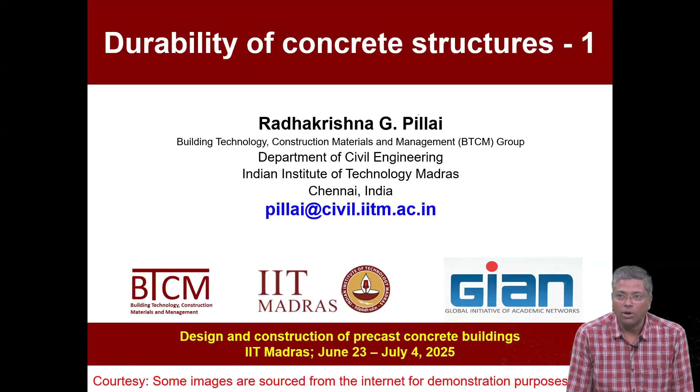What are the durability related issues in reinforced concrete structures and how do we design for it? I'll talk about the design aspect in the afternoon. In the morning, we'll mainly focus on corrosion aspects - the different types of corrosion we experience in concrete structures, and also something we usually neglect, which is the type of steel bar we use. Typically we only talk about mechanical properties of the bar and not anything about corrosion resistance, and we assume everything is fine, but we find some challenges with that too. So these are the things we'll talk about in the morning session.

Some of the slides some of you might have seen earlier also, but for the course we have to deliver those. So we are actually experiencing a construction boom in our country.

When we talk about why do we worry about durability - do we worry about durability? Raise your hand if you really think about durability when we talk about new structures. I want to make this class very interactive if possible, please ask questions in between. Don't worry about the recording which is happening, that is mainly for other purposes.

Okay, so very few hands were raised. What does that mean? Do we really worry about durability of concrete structures when we build them? Or are you only worrying about design for commissioning? Design for commissioning or design for durability - what do we worry about, or both? Tell me. Both, but the weightage for design for commissioning and design for durability, how much is it? Is it balanced? The silence speaks. Okay, so today we'll focus on the second part, design for durability.

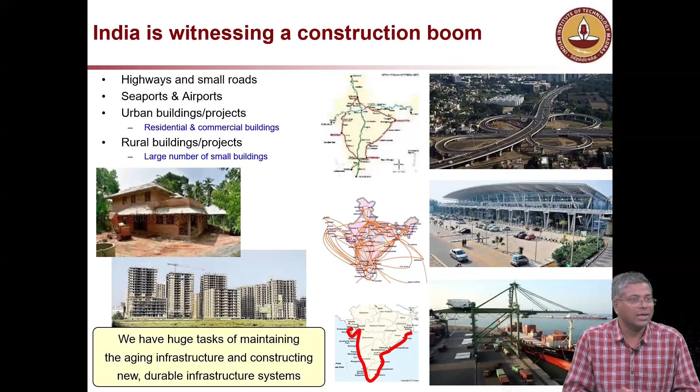Corrosion map - you can see here, the coastal line has a lot of chloride, so it is very important to design for durability. And we'll see why chloride only - is it chloride only? Do you see any other terminology on the screen other than what is important? One is chloride coming from the ocean side, and then you also have carbonation.

I had an experience with one of the buildings in our city, Chennai, where the building is about 50 to 100 meters from the coast, and the problem was not chloride - the problem was actually carbonation. It's a silent killer. Carbonation happens when it is 60 to 70% humidity, which may be the case when you talk about 100 to 500 meters from the seashore. And depending on the pore structure or porosity of the concrete, chloride might leach out - it won't really enter into the concrete if it's too porous, but carbonation will still happen. So it's not only chloride.

Why I'm saying this is generally when people talk about corrosion, they blame chloride first. But carbonation is also something very, very important and we have to consider. We'll cover that also today.

Now, why we really worry about all this is because it costs a lot of money - if there is no financial impact, probably we won't worry much. This chart is all over the place, everywhere we show this chart. About 4.2% of the Indian GDP is what we spend in India - I use the word spend, not invest, because it's actually something you don't get back, no return is there. So 4.2% is for India, very high. Look at Japan - what does it indicate?

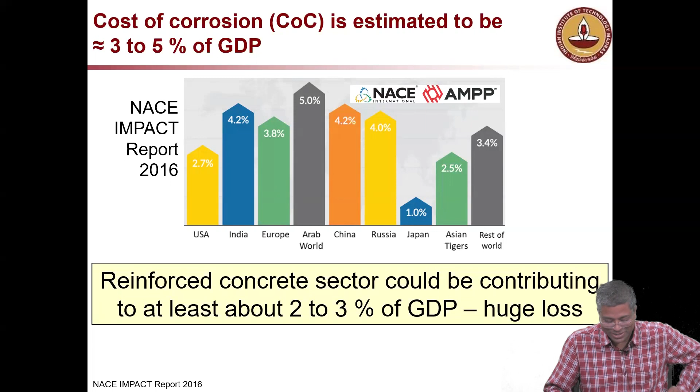Now, those numbers, how do we get them? These are some statistics, because a lot of information is there. Some slides I'll skip very fast, some slides we will go very slow. It's all printed and given to you. So this is just numbers, very large numbers.

50% of the structures actually experience a repair in how many years? It's real data, it's not something I cooked up. There was a major survey we did about 10 years ago, an international survey, and the outcome of the survey was like this.

50% of the structures - so if you talk to anybody in the construction sector here, I was told the other day that when you start a project, in the initial month itself, people will buy repair mortar. Why do you need repair mortar in a construction site?

Whatever - why do you need that? You have to build perfection into the construction itself. You don't need a repair material in the construction site. That indicates that something wrong is being done.

30% of the steel which is made is used to replace other steel. That means the other steel has gone bad, so you are replacing it. Now, gone bad means corrosion, nothing else. 40% of the cement is used for making repair materials. So there is a huge demand for repair, and that demand is coming because structures are deteriorating, either by corrosion or some other reasons.

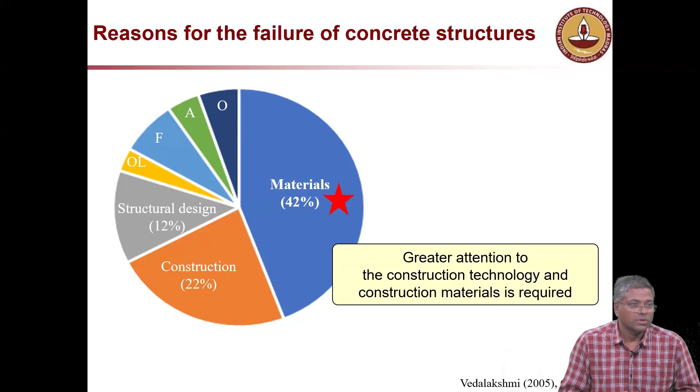It's very, very important. Most of the failures we see, it's not like structural design - that it's perfected now, we know how to handle that part. But materials, we still are learning how to handle it. So there is a lot of things to do in the materials and construction aspects.

So there's a lack of respect for concrete, lack of respect for concrete as a structural material. People generally think you can do whatever you want - concrete is a very resilient material. This is not always true.

Especially houses are something people build, and people's dreams go into them, right? It's not like your cell phone or a shirt which you can replace without really changing your lifestyle. But if you have a problem with your house, imagine the people who bought houses in that apartment complex.

So like that, examples are there in various cities and countries. So corrosion is becoming something very, very important, and in a very hard way we are learning the issues if you do not care about material design.

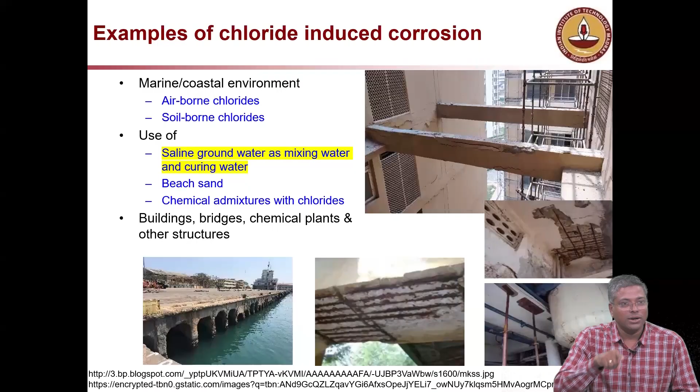See that map which I showed, it was just done. Let me go back. There is something wrong also in that map. This map here is mainly focusing on the coastal belt. Just now I said about Rajasthan, you have issue. You go to Delhi, you have issue. So this groundwater is not considered in this map, this is only airborne chloride which is considered. Maybe in the next presentation I should remove this map. But good point, so we need to think about groundwater.

That's very, very important. This is why I'm showing all these examples, so that you can feel like, okay, there's something to do.

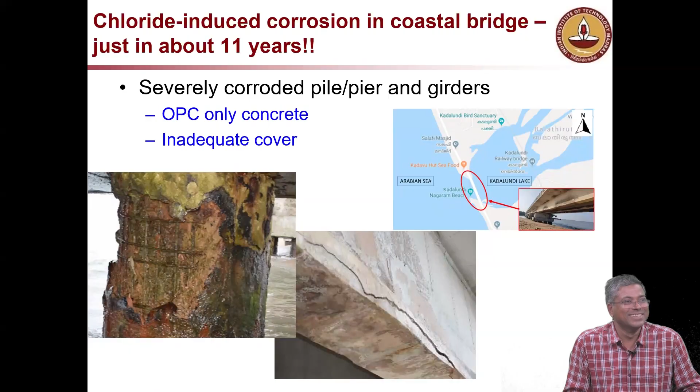See this picture here, again, not a very old bridge. Probably the bridge was designed for 50 years, but we started seeing heavy corrosion in just about 11 years, that means corrosion started well before that. This is not something which you want. This is actually a highway bridge. Shankar would know about this, so tomorrow you can expect a question on that.

Yeah, go. There is 500 ppm is what we recommend. I think it says, right, 456, Shankar? 456 says the chloride limit. No, which code is saying that? 456, no? Yeah, it says 500.

Internationally it is 1000, but in the Indian case it's actually better, we say 500 as the limit. I'll talk about that later when it comes to curing, because even 500 I think is very high, I'll come to that later.

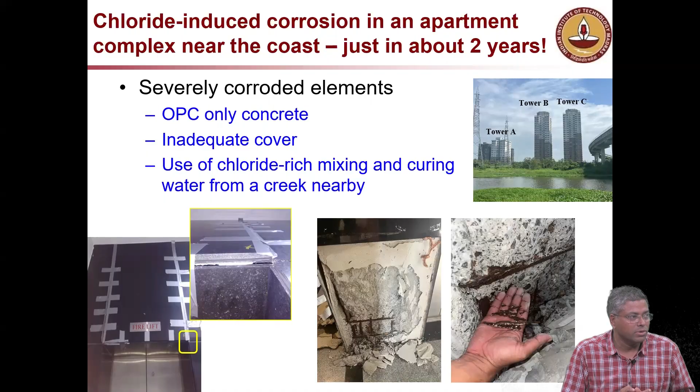We generally think any water can be used for curing because it's happening at the site, so quality control is less. This is again why precast is good, because it will be done in a controlled factory environment where you can control everything more meticulously. So the whole idea of precast is to move everything, or maximum, from site to a controlled factory environment, so minimal work happens at the site. We need better planning, but many other things are there.

Now coming to service life, you have two different aspects mainly, forget about the repair part. I'm talking about 1 and 2, so totally there are 3 phases. The 1 and 2 is what we really worry about in the beginning, at the time of design. So which one do you think we should equate to? When you say service life of a structure, is it the length of the initiation phase, or the initiation plus propagation phase? What do you think we should consider?

Initiation is the time taken for the steel to start corroding, or to be precise, the time taken for chlorides or carbon dioxide to travel through the concrete cover, reach the steel surface, and then initiate corrosion.

In the examples which I showed earlier, that was 0, right? Because you had chloride contaminated water, so day 1 it starts corroding. It took 5-6 years to show up as cracking and spalling and all that, but it started on day 1 itself. Here I am not talking about that example. Here we are talking about good quality concrete, made with good quality water, but eventually the airborne chlorides will ingress into the concrete through diffusion. So that process is what we are talking about here.

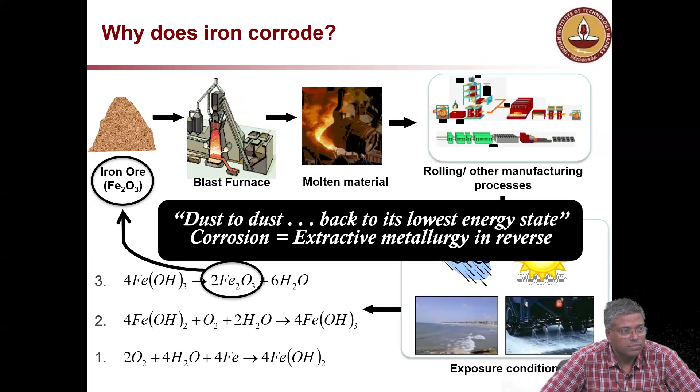You can see a long list of elements there, small in quantity, but they have their own roles in achieving various mechanical and chemical properties of the steel.

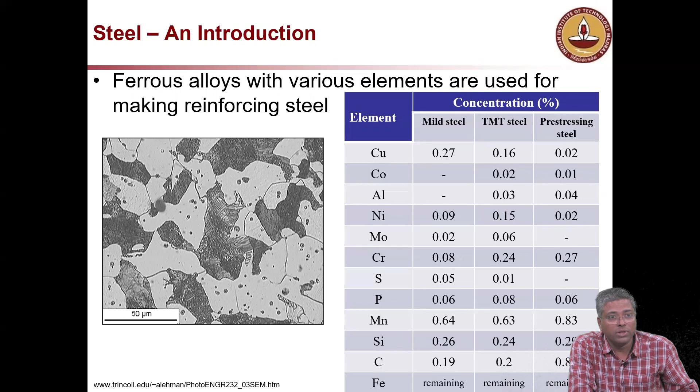Okay, your hand, you put in water, will something happen? Nothing will happen. Put it in acid, you may not have the hand again. Put it in a highly alkaline solution, will something happen? It will burn, very high pH. So more away from the neutral point, pH neutral, you have a problem. Your skin is not stable, it will start reacting.

But steel likes the high pH. It is very stable in a very high pH environment. This is the reason why we are able to use steel in concrete in terms of chemistry. So in addition to coefficient of thermal expansion, which is mechanical, this is the chemical reason. So there are two compatibilities why we are able to use steel in concrete.

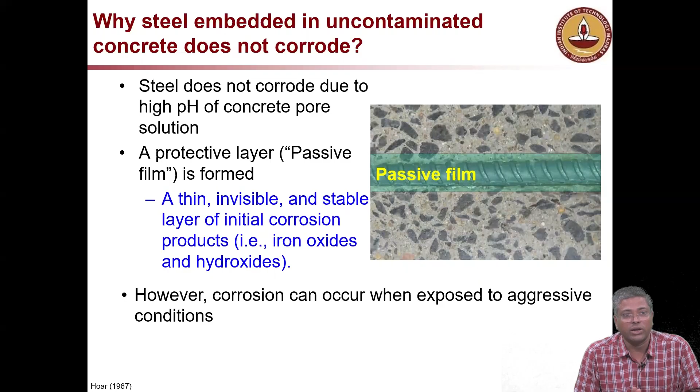Now, before going into chloride and carbonation, do you have any question until now? No, that's a new structure, new phenomenon. It is beneficial, people also use it, and it is much better than using chloride contaminated water for sure.

But you have to compensate for the strength. Curing compound typically does not give full efficiency - the efficiency of curing compound is about 80%, let's say. In other words, if you're talking about 100 MPa concrete, in moist cure condition you get 100 MPa, but if you use curing compound, you might get around 80%. So you have to compensate for that. But that is still a better way than using water which is not good.

And over the piers is where engineers don't go up and check. If you go to any of the, even metro, I have seen some of them, you go up and you will see rough concrete surface like waste concrete, everything will be there on top. You want the top surface to have a little camber so that even when rainwater comes, don't rely only on the pipe which is provided, but try to get the water out. So design for water repulsion or resistance is also another concept, like design for commissioning, design for durability, design for water resistance, design for maintainability.

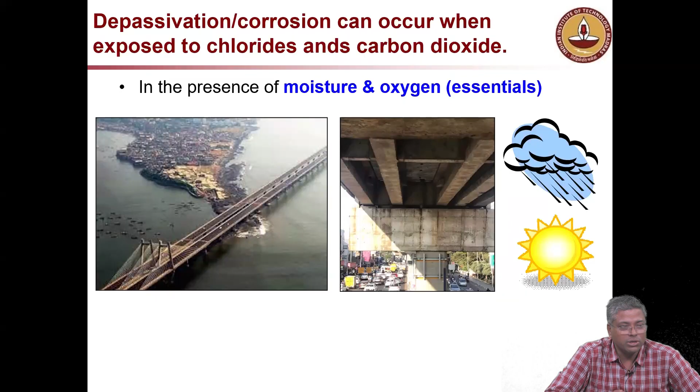But if you go with precast, you can actually do everything at the factory, you can design for all these fine detailing. To do these things on site is very difficult.

When it comes to corrosion basics, there are four components. In any corrosion cell, if one of these four are missing, the corrosion cell will not exist. In other words, it's an open circuit, so you will not have any corrosion.

Now if you have corrosion happening, you will not see that the entire bar is corroding at one point, at one time instant. I'm not saying if you take a bar which was getting corroded for 10 years, you will see corrosion everywhere. But at one point of time, the corrosion reaction will have a few anodes, a few cathodes, and the connection.

The bar itself plays the role of the electronic conductor, and the concrete plays the role of the ionic conductor. This is how it is. Any corrosion reaction, this is how it is.

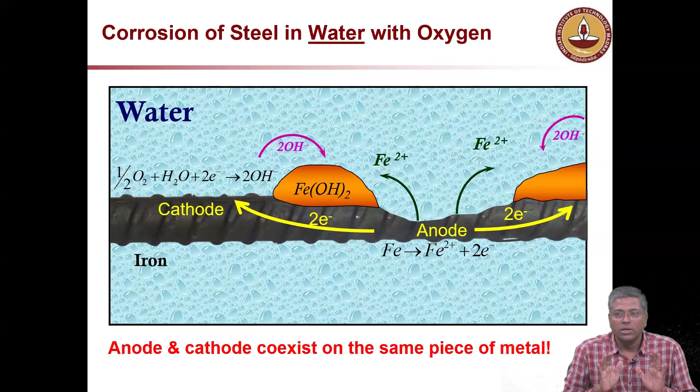I have all these slides, I'll share with you. So there's a 6 times increase in volume. It's a very good deal - you buy 1 cup of steel, you get 6 cups of rust.

It's a good business, but nobody will buy rust from you. People will buy only steel.

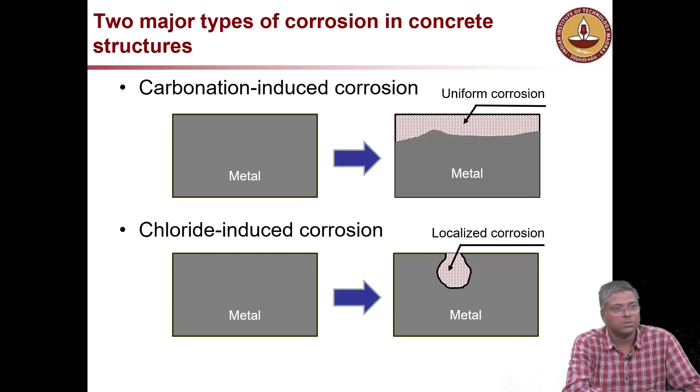What is the difference? In carbonation, you have no pitting, uniform corrosion loss, whereas in chloride induced corrosion, you have pitting corrosion.

I have a slide in the afternoon on that, on plaster. It's only cosmetic - plaster is only covering whatever we could not do properly on the concrete. It's a patch. Only architects will like it.

Usually no, because it's not common - it would be very costly if it were there. The reason is you have more surfaces, you have sand or very fine particles, so the binder has a lot of interfacial transition zones. So the penetration is much faster in plaster compared to concrete, because in concrete I have rock pieces which will block it.

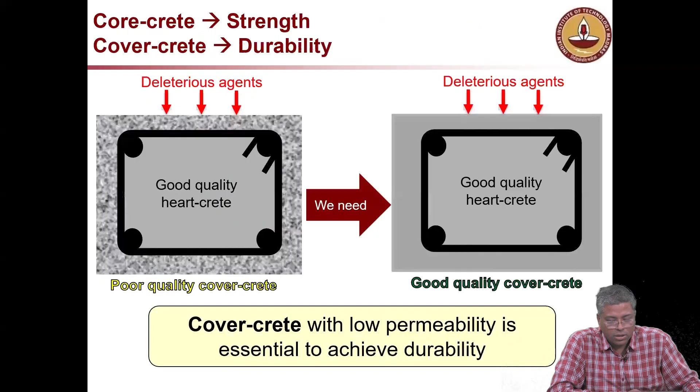Atmospheric CO2, when you say 0.03 to 0.04%, that is far away from the city. Right here, if you go and measure, you will see very high levels, close to 1000 ppm. We have done that measurement - we drove from the seashore in a car and measured the CO2 level along the roads, and it's very, very high.

And if the relative humidity inside the concrete is around 60 to 70%, that is the worst scenario. Most of the case it is like that in Chennai. If you go to Delhi, maybe not - it will take a long time to carbonate because it's a very dry environment. If you go to Hyderabad, maybe not either. So you have to look at the ambient humidity condition to see whether you should worry about carbonation or not.

So when doing material selection, you have to think about multiple aspects - it's not just one point you take and make a decision. You have to think about exposure condition, and what is the life you want. If I want to build something for 10 years, I don't worry about all this, but if I want to design something for 50 years, I have to worry about it.

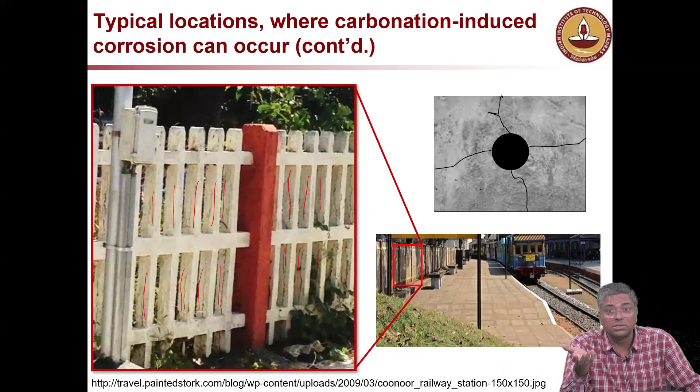Now this - many of you might be familiar with railway stations. I have talked to railway people, they said every 2-3 years they change this. Imagine there are 7,000 railway stations in the country, and think how much waste you are creating with this. This is just mortar with a rebar, a very thin 6 mm diameter rod inside - a very good example of carbonation-induced corrosion. It has nothing to do with chloride, and this is something we should not practice if we want longer life. Again, you might say this is not a major structural element, but it is creating waste which we have to manage later.

So what is carbonation? Carbonation is essentially - you see the yellow equation there - you have a high pH contributor, which is calcium hydroxide in the concrete, that reacts with carbon dioxide, giving you something.

Now when this reaction happens, what happens to the pH of the concrete? Look at the equation and think about what happens to the pH. It reduces. Why? Because I am consuming - what am I consuming? Why is the pH decreasing? OH minus is getting consumed in this reaction.

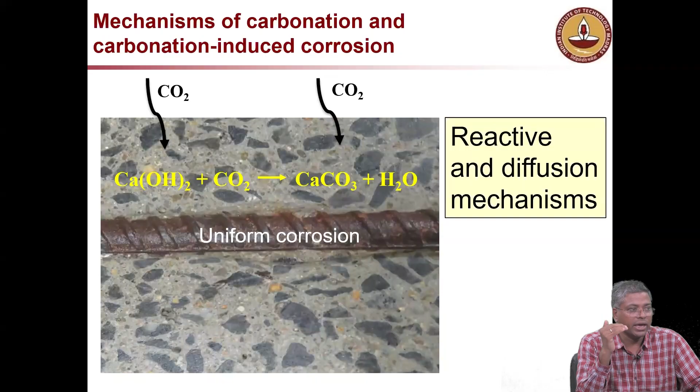So when the pH of the concrete at that interface between steel and cover reaches about 9, steel will start corroding. Steel will not corrode when pH is very high - even people say at 10 it starts corroding, so different theories are there. But let's say for this class, we will say 9 is the critical pH. So when the pH of the concrete at the steel surface reaches 9, steel will start corroding. This is how it really happens.

More detail on what it does - you can see that first the CO2, if there is enough moisture, will form an acid. That also causes a problem because you don't want an acidic environment, that is why the pH is decreasing. And eventually you can also see that later the CSH, which is the binder, gets disintegrated - that means again, it is not something you would like to have.

Then eventually when the pH reaches 9, it attacks the passive film, which is not stable enough. We discussed that with the Pourbaix diagram - this one here, when the pH reaches about 9, you see on the horizontal axis, look at 9, draw a vertical line over there.

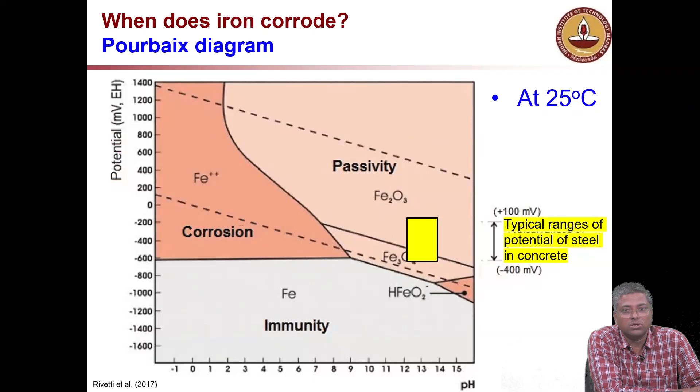Okay, so you see that corner over there, that V shape kind of at the 9 o'clock position, from that point onwards to the left side, it is corrosion, the dark brown region, right? So pH 9 is something which is very critical. You don't want a concrete with a pH of 9 or below, because it will start corroding the steel.

Now, how do we test it? It's very simple to test. What you look at is the depth of carbonation. You can see here, this is a cross section of a fractured piece of a beam, which we are exposing with different types of concretes. You can see here the peripheral region is colorless.

If you go back to your chemistry class, 11th grade or so, you might have done some experiment where the color changes from pink to colorless, or colorless to pink.

Using a titrator, suddenly it changes color, right? So the pH, that critical pH of 9 - you can spray phenolphthalein solution on the freshly fractured surface. Why freshly fractured? You cannot break it today and come back to test tomorrow, because it will already have reacted with the carbon dioxide or moisture available in the immediate environment. So you will not see reality. You have to break and immediately test it.

Spray this phenolphthalein solution and look at the color change, and that will tell me the depth of carbonation. So here the colorless region is carbonated concrete, and the pink color region is the good concrete. So don't get confused about which is good and which is bad - colorless is bad, pink is good.

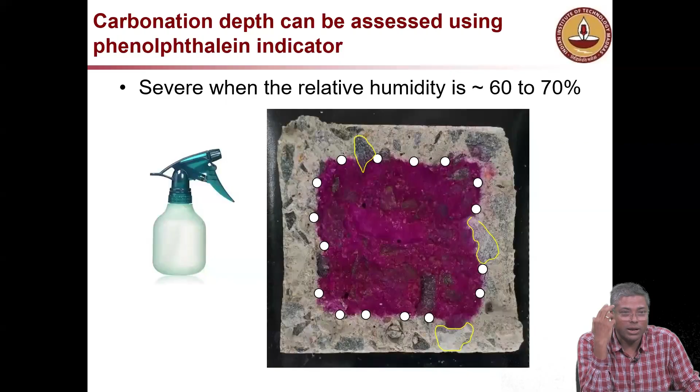Now here, this example shows what? Is the steel going to corrode or not in this example? About to - because that second blue line from the top, you can see that is where the pH is 9, the critical surface. Now the bar surface is just touching that. That means it's about to corrode.

Now in this case, which will be anode and which will be cathode? What do you think? The top surface of the bar, the thin line, will become anode. The remaining surface of the bar will become cathode, because you have very small connect, you don't need an additional bar. In the same bar, you can have both anode and cathode, and that will start corroding like that.

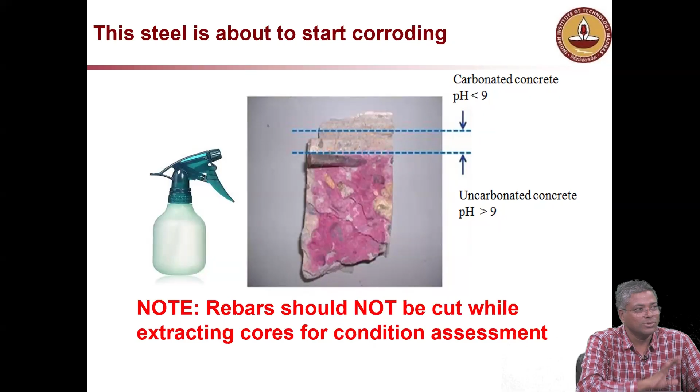But don't cut rebars when you take samples. This picture I got from one of the journals, but anyway, things happen. When you go test the concrete, you don't want to create a problem for the concrete structure, so it's always important not to cut the bars.

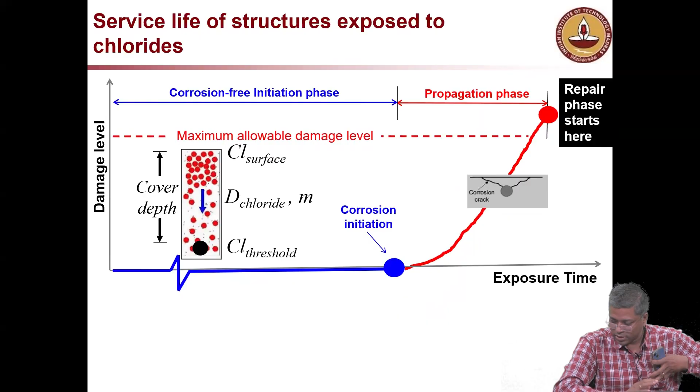Okay, if you've been to temples and all that, you can see those kinds of things. Have you ever observed, even in houses, some railings made out of cement-rich concrete? Ornamental pieces made out of concrete will be rich in cement. It will have no resistance. What is that element in concrete which gives the resistance to chloride ingress or carbonation?

In concrete, which plays the major role in resisting all this? What element plays the major role? So here, when you put cement-rich material, you basically have no resistance, and that is right. This is from, if you've been to Chennai, the Ashtalakshmi temple. If you go to the top of the temple, you will see these kinds of things fully corroded, right next to the ocean.

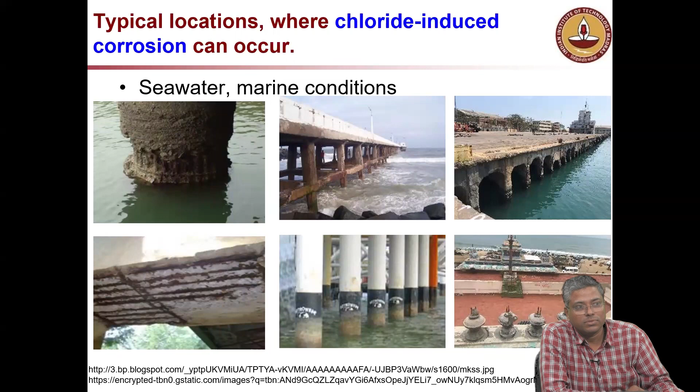If it's made with concrete, I can actually make it last much longer, but without aggregates it's almost impossible to make that. Aggregate means coarse and fine - I'm talking about both. This is another example, again facing the ocean. The middle building, on the other side of the wall, is where all the IAS officers in Chennai sit.

On this side of the wall, they don't know what's happening. It's in the port. So the bottom right, what is the observation in that photograph? What do you observe from that? How do you prevent that leakage?

See, the pipe material is a brittle material. And concrete structure, there is always movement in that structure. You have to accept it. Now your pipe, because it's a brittle material, when the structural elements, like in one sunshade and another sunshade, there are movements, it will not bend, but it will crack.

So if your pipe is flexible, or rather not pure rigid material, then you will have no problem. That's why nowadays, from cast iron to ductile iron, now we are using PVC or CPVC pipes. Cast iron will crack very easily, very brittle material. So later people started having ductile iron. In cast iron corrosion was not a problem, but brittleness was a problem. You brought in ductile iron, then you have a corrosion problem.

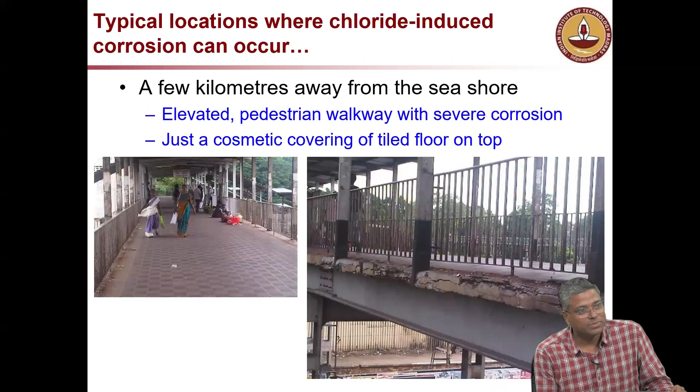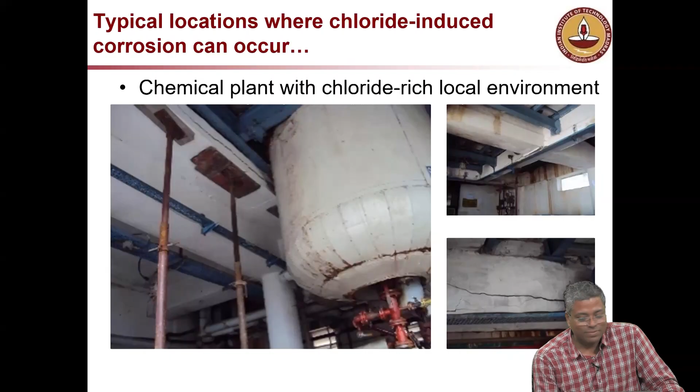Severe corrosion. But again, I feel this could have been addressed when you start seeing a crack, not wait until it starts cracking and spalling. We have the technology now to prevent those kinds of things. This is again a 5-year-old building where the structure is being protected by using galvanic anodes. I'll see if I can include a half-hour lecture on this next week, but otherwise we will see.

Now, what is the type of water we should use? This photograph, if you can remember, forget about all the text, just the photo - this is the type of water you should use. If the MD of your company comes to the site, he should drink this water. He or she should drink that water which you give to concrete. I know it's a little impractical because we don't have drinking water properly everywhere.

So that is where now we try to use treated water. The way out is to ensure testing. We know examples where RO plant is there on the site, but doesn't work. So end of the day, you have to test water and also perform routine testing on the chloride in concrete, not only in water, because you never know who puts chloride into the concrete. So if you can test chloride in the final product, which is concrete, before paying the last bill.

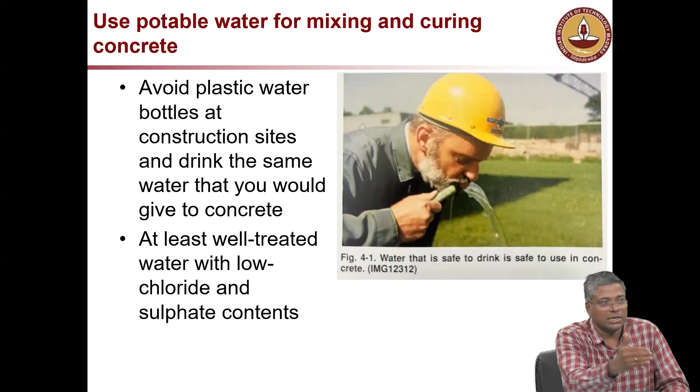In chloride induced corrosion, what happens is, like in carbonation induced corrosion, pH was the governing factor there. Here, even if the pH is high, if the chloride concentration at the steel surface is beyond the chloride threshold, you can have corrosion.

So there will be locations on the steel where you get more chloride than other locations at a particular time, because it is not a straight line. Speed of chloride penetration is different at different locations, so at some points you'll get more chloride than others. The first point where you get more chloride than the other will start corroding. That's why you have preferential corrosion in case of chloride induced corrosion.

Once an active cell forms, it's very difficult to change that, stop that corrosion, and another one will form. So you'll have pitting corrosion. There is also one more reason, because it's a little bit acidic nature in this chemical reaction.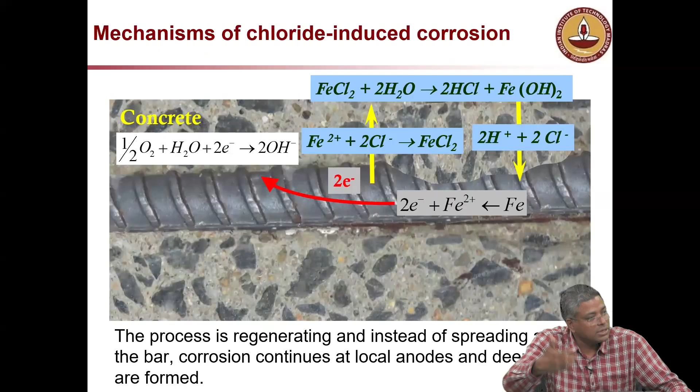So what type of corrosion is this? Micro cell, macro cell, what will you call it? Strands, usually you put in high quality concrete. Resistivity - this particular specimen is from a high resistivity concrete.

So micro cell. Now cracks, also a big problem. Anything, any doubt on chloride-induced corrosion? I can't hear you.

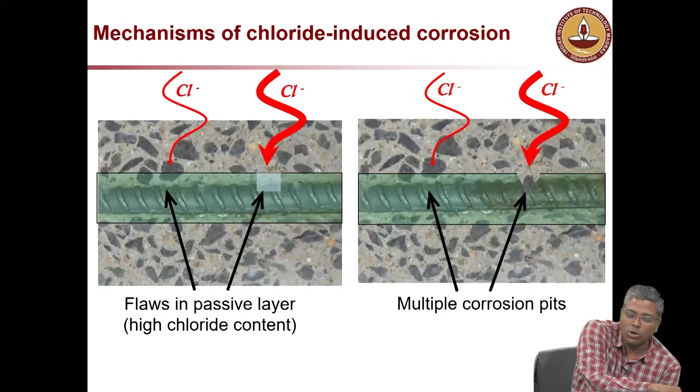So the other slide I said, it's assistance - chloride and carbon dioxide, they don't take part in the corrosion reaction. They just provoke steel to corrode. They create the problem, but they don't actively participate in the problem.

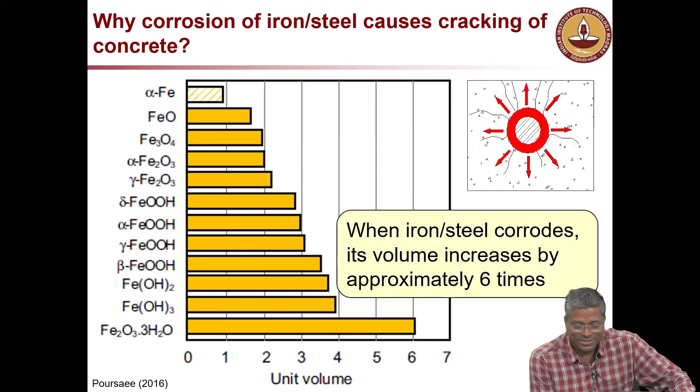Is that clear? So corrosion reaction, it is moisture and oxygen - that's what takes part in the corrosion reaction. These are the essentials. If you look at anodic reaction and cathodic reaction, you will see moisture and oxygen, that's all. You will not see chloride or carbon dioxide in the anodic cathodic reactions. You will see them in the things which lead to corrosion.

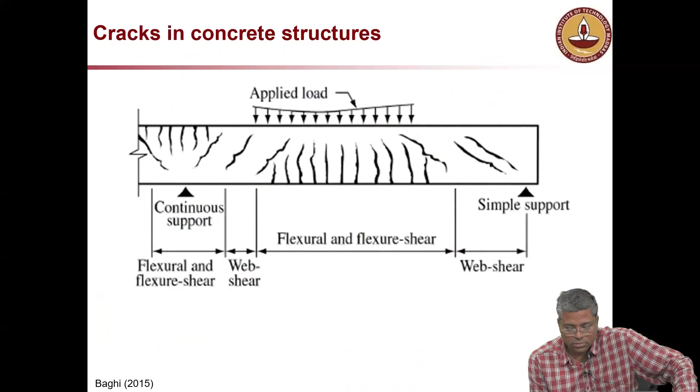Okay, cracks. This is very, very common, right? This kind of cracks - people from the site, definitely you must have seen tons of cracks like this.

One reason - you remove formwork earlier. You save money on cycle and spend money on repair products. Because to inject one crack, with epoxy or whatever grout you use, it costs at least 500-600 rupees per meter per nozzle. So that's very costly - if you wait for a few more days and cure the concrete better, you don't have to do that.

But people will say remove it, use it elsewhere, because the planning engineer will tell you to do that. But the planning engineer should also have a column for the planning for repair.

The other day I saw, just last week, a 6-story building where on the ground floor they put a prop like this. And you know what's there? In between the steel plate of the prop and the concrete, there is a wooden piece.

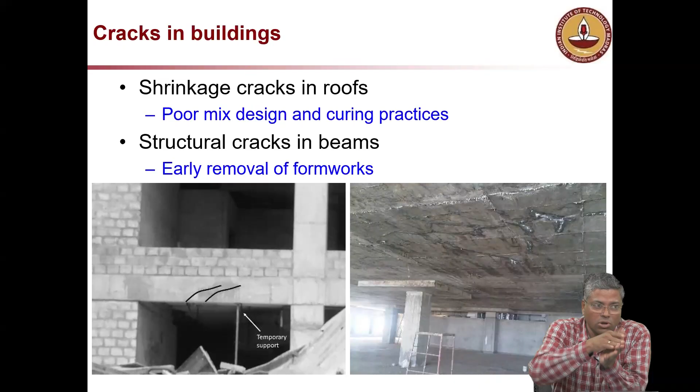Salespersons will come and sell the material to you. You engineers have to decide whether you need that or not. My opinion is: do good concreting. If you do it, you don't need that—maybe a little bit here and there if at all there is a crack, but you don't have to cover the whole thing with a waterproofing layer. It's not required. Typical waterproofing applications also need to focus on the joints, not everywhere. You don't need everywhere. But okay, that's a different topic.

No, every single one—about thousands of girders have this problem. I don't know about corrosion, but every time I go, I look at it. I'm just showing real example problems which we have with respect to durability.

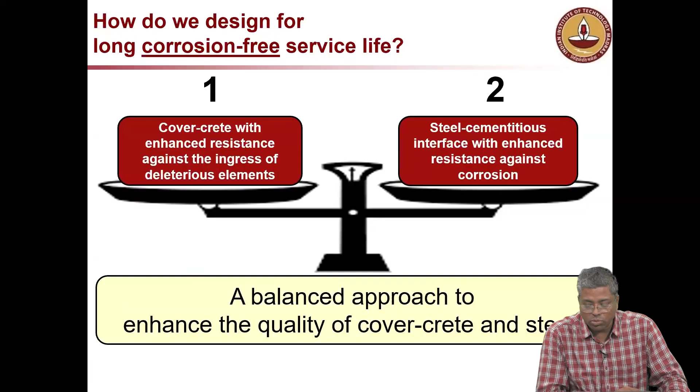How do we design now? Now we know all the problems—corrosion problems because of chloride-induced corrosion, carbonation-induced corrosion. Now how do I choose materials and all that? We discussed this earlier. I have so many materials available in the market today—different types of steel, different types of concrete, a whole lot of chemicals. All these are available.

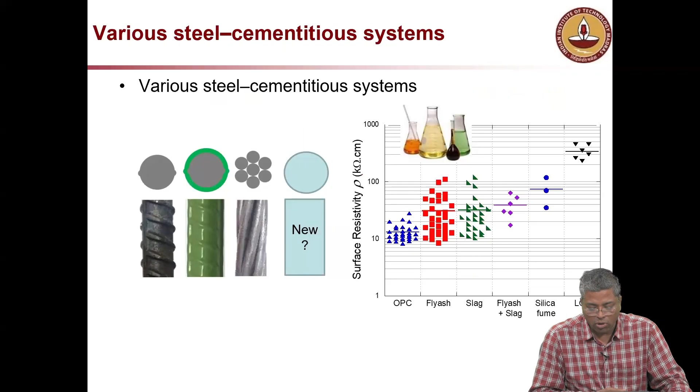Now what I look for is, in this lecture, I'm going to talk about the steel which we have—TMT steel. Okay, now I've written it as QST, not TMT. See, there is no steel in this world that is made without a thermal and mechanical treatment. Any steel you pick goes through a thermal treatment and a mechanical treatment. Then why do we call it thermomechanically treated steel? The story goes that somebody in SAIL, when this was introduced in the Indian market, started talking about it, and somebody wrote 'thermomechanically treated' and everybody followed.

Like Maggi, we used to call it Maggi until other players came into the market. Maggi was actually the first noodle brand. Now Top Ramen and Patanjali, all that came. So Maggi, they might have filed a case, I don't know how, but the thing is, whoever starts gets the name.

What this means is you have a peripheral region which is a full ring, which is tempered martensite. That is strong, very strong and hard material. The middle one, or the core, is the ferrite pearlite, which is ductile in nature.

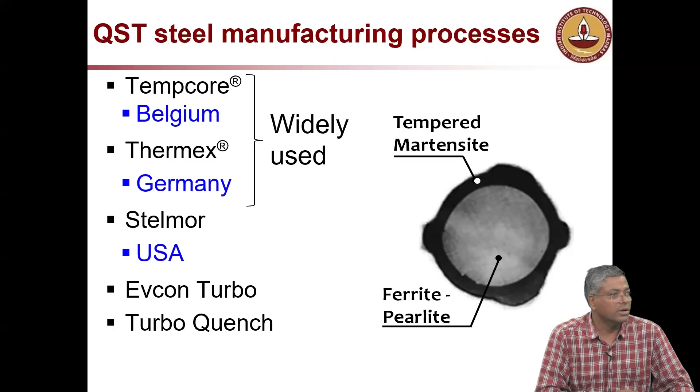They do quenching. Remember what the blacksmith does? They quench the knife edge. Otherwise what happens? You won't be able to cut even bananas, because the moment you hit it on the table, it's going to blunt the knife edge. So what property are you looking for in that knife edge?

Sharpness is there. Hardness is very important, okay, toughness also. So you need that hard and tough surface, then only it will work. So for rebars also, we need that thing, and that is why we are quenching.

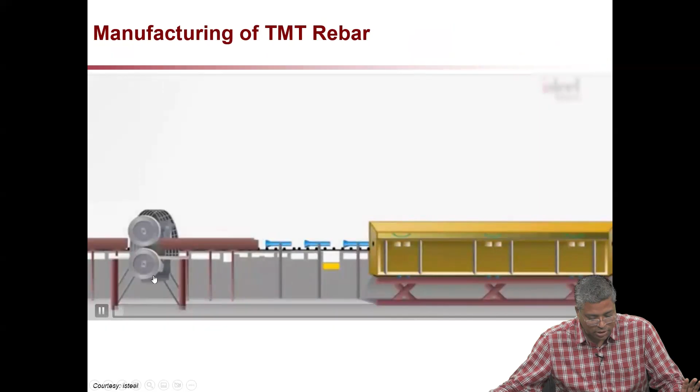So essentially the TMT bar is a composite material. If I can play this video - yeah, this is how TMT bars are made. Playing but no sound. You can see the red line is the TMT bar, moving very fast - you can't even see how fast it is, that fast.

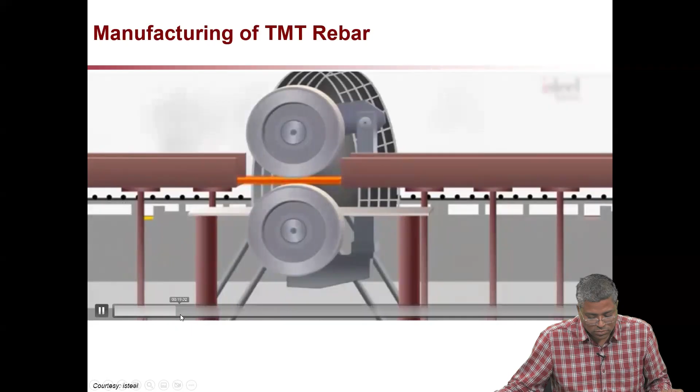Now these - you can see this is the quenching box. The red line is the hot rebar, and you spray water onto it inside this quenching box. So the entire surface of the bar gets water for 1 second. The bar passes through at that speed so that it's only over 1 second it gets water sprayed onto it. So you see the cross section changes like this. In 1 second you get the surface temperature at 200 degrees Celsius, and that's how the final bar looks like.

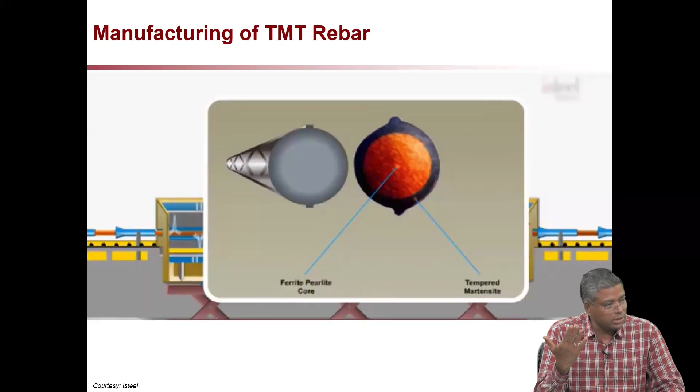And it's not a microscopic image - when you look at it, you can actually see it. I'll show a video now on how the color difference is. This is why we say the TMT bar is essentially a composite bar.

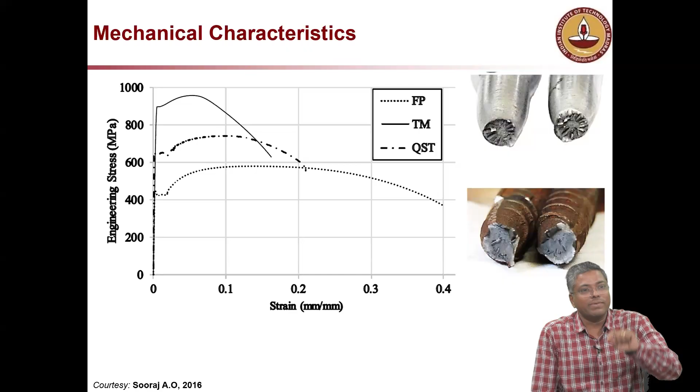Now the area of the peripheral, the tempered martensite, versus the area of the ferrite pearlite will determine where the center curve is, or the composite behavior is, and that area will be determined by the quenching action - how well you are quenching the bar, what is the time through which the bar passes through the quenching box, that will determine it.

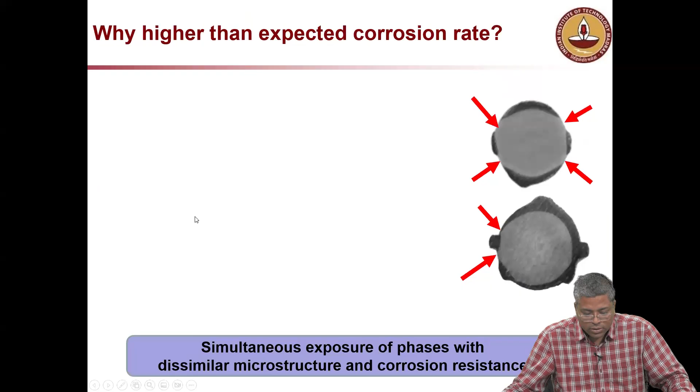So the issue is with this bar. How this evolved, I should probably tell. 10, 15 years ago when we started this testing, CTD bars - the earlier bar, the high yield strength bar, which we call HYSD bars - they are supposed to have, or the TMT bars are supposed to have, lower corrosion rate than the CTD bars. Am I correct?

Don't drink water and come.

That is why TMT bars came into the market. The CTD bars are cold, twisted, deformed bars, where the spine of the bar looks spiral. If you go to a 20, 30-year-old structure, you will see the spine is not a straight line. On the bars we have ribs and spine - the transverse one we call rib, and the straight one we call spine. The old bars were twisted during making, so the spine was spiral, and because of that, it was corroding more.

So people came up with this TMT business, which is actually corrosion resistant. We collected a lot of bars and did testing in the lab, and we found that actually TMT bars have the same corrosion as CTD bars. There is no improvement in many of the products in the market.

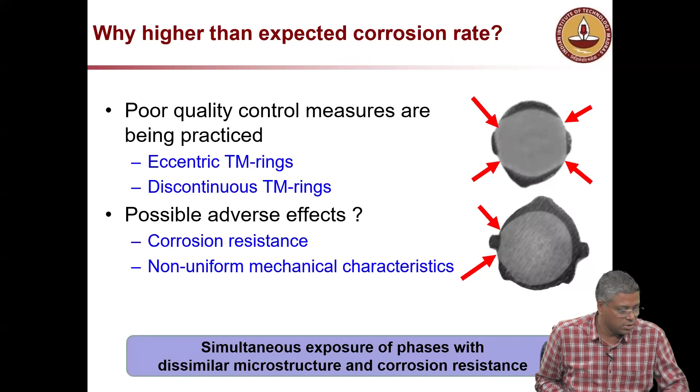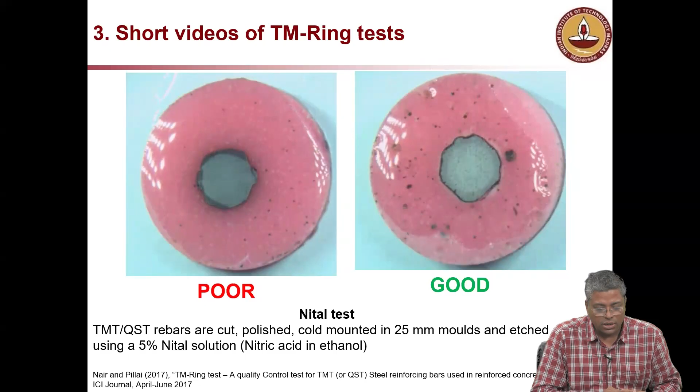So then we tested - how do we know whether there is a ring or not? You can cut a rebar piece, and this is called etching, acid etching. You put it in 5% Nital solution - a very simple test to do. Maybe we'll show you this in the lab also next week. You can see on the left side, no ring; on the right side, full ring. No SEM or anything - it's just a direct view.

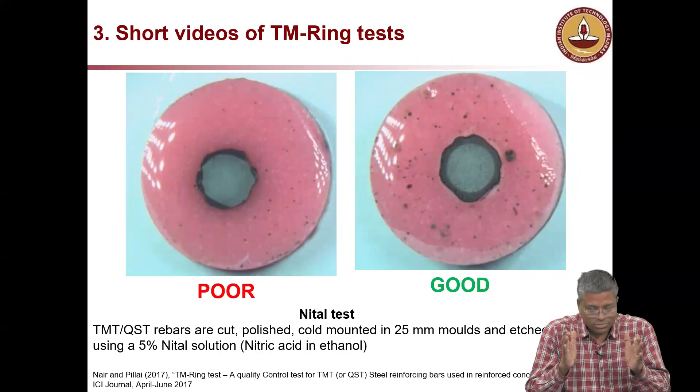It reacts with the tempered martensite and basically does the etching - it eats away some material, and then you see the color difference. The ferrite pearlite shows light gray, and the tempered martensite shows dark gray.

When I saw this, I called a professor in Germany - this was really surprising to me. I told him, sir, I need some TMT bars, and he said, what is TMT? That's where I also started thinking, why are we calling it TMT? He said, over there, it's all QST bars. Out of India, we call it QST; within India, we call it TMT. Now that we are changing the code, slowly you will also start seeing QST.

We got a lot of bars and found it's only in our products. All the European products have very good rings, whatever we test. So it is doable - it's not that it is not doable. I'll show you that also a little bit.

The one on the left side is a good bar. The remaining ones with red dots show inadequate ring - that is actually regions with poor quality, where you can have galvanic corrosion. Why? Because you have two dissimilar metal surfaces in contact with the cement or concrete, so you can have a corrosion cell. Small micro cells can form where you see the red dots. This is probably one of the reasons why our structures built with TMT bars are corroding.

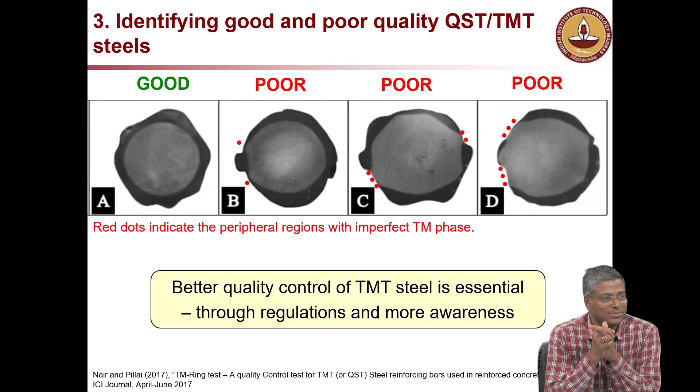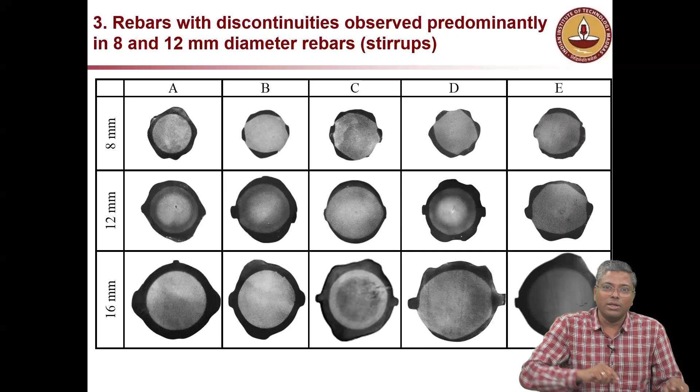And they corrode where the bend is - I'll show you that also. So we tested many products. You can see on the top line, it's a small diameter bar, then you have the larger diameter bars. If you ask a company, they will show you the big one only, because at the bottom, 4 out of 5 are passing - you can see the ring is good. As the diameter is smaller, it's difficult to maintain the ring or develop that ring during the quenching.

Okay, it may not be difficult, but they neglect it because it's like a small chota bacha, a small baby. Why do we worry about it?

In the steel industry, this was a case. I was told that even the largest manufacturers in the country used to outsource the small diameter bar production. They used to make only large diameter bars because there is not enough money in it. So you ignore the smaller one, because money is based on weight. But now we are realizing that the small ones are the ones which cause problems, most of the corrosion is happening on the stirrups.

Agreed? Why? Smaller? No, not because it's smaller dia. Cover is smaller, stirrups will be outside. What bar? That's why I asked what bar. You can't call it main bar.

Do you check shear resistance when you do structural design? Is shear check less important than flexural check? Importance is the same for both. So why do we say one is the main bar, taking care of flexural, and not the other? One is main, that means the other is not main, right? So my suggestion is, let's get rid of this main bar terminology.

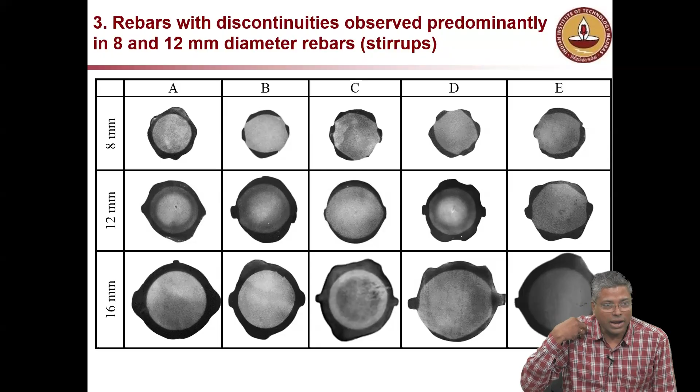So when you bend it, it actually peels off. And now when you have peeled off bent bars like that, you don't need chloride to cause corrosion. This whole phenomenon of corrosion in the right side case is crevice corrosion. Maybe you can write this word down, crevice corrosion, because you have a gap there.

So when it peels off, let's say this is the bar and then it peels off, so I have a very narrow gap. In that gap, you will have crevice corrosion because of the difference in oxygen concentration. It's not very important, you can write this word down, if you are interested you can read more, because I don't want to pump in too many things into the head. But the point is, you don't need chloride to cause corrosion in these bars.

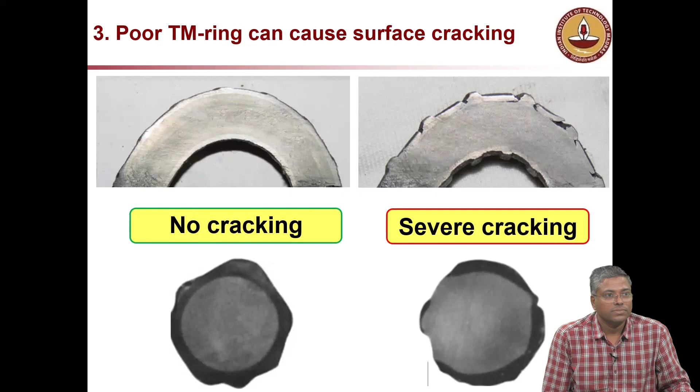The mechanism is different. And this is what we do in all our earthquake resistant designs, we need bends at a certain degree, 135 degrees. When you do that, you have cracks like this. Our code says the bar should not crack, but nobody checks. Right? So exactly where that bend is happening.

You can observe this next time when you are at site also, and if it is cracking, you have to reject that lot. I think this is the reason for most of the corrosion in many of the structures which we have, plus of course low cover.

We have it written in the code, but we don't do it. Which one? The rebar, I don't know if we have it. We don't have it. I don't know for the rebar if it is there, but we can.

Yeah, that's what happens. When you talk about steel, we test only tensile strength, one number. We don't test modulus. I have seen test reports which say modulus is 200 GPa. Test report. You know what it means? Test report without actually doing the test. So you get those numbers exact 200 because it's difficult to test. Modulus is not something very easy to test, it's very difficult. But if it is difficult, better not to write it. If you haven't done it, you should not write it.

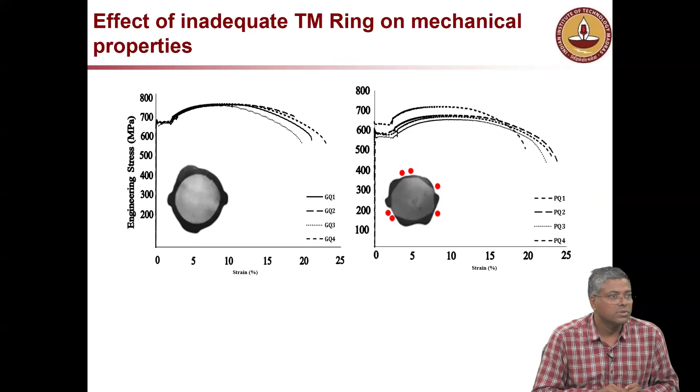So this lack of proper TM ring also causes problems with the rebars, sorry, a problem with the yield strength. So it's not only corrosion, even in the mechanical properties you will have variations. Now I tell all this problem, but this is very recent work. We are seeing how to address it, because 60% of the bars manufactured are not by the major companies.

60% of the steel bars in India is not manufactured by the major companies. So if I say all your bars are a problem, they'll all come and do something to me. So we have to also find a solution. Our job is not only to find problems, we also have to find solutions. So what is the role of an engineer? We have to identify the problem. That's also our job - identify the problems and then find solutions.

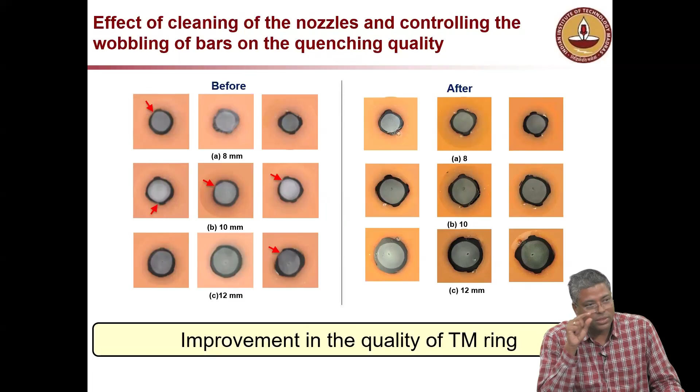So here you can see that what we did in one of the plants - the quenching box, you have to really clean it very nicely. This is what happens - in many places they don't check because in the standard there is no need for checking a TMT ring.

In our current standard for steel bars, there is a section which says how to test the TMT ring, but it explicitly says based on this test you cannot reject a bar. Then my question is, why do you tell all these things if I should not use it? Why is it so? Because at that time the standard was made by manufacturers. You will see that many codes, if you're talking about a cement BIS code or for steel, product manufacturers will govern it. They will have an interest in being on the committee and then do it.

Now it has moved to the user side. Civil engineers are now deciding how the bar should be. Earlier it was heavily done by the metallurgical department. So slowly we are also learning and changing things. This will be there in the new code.

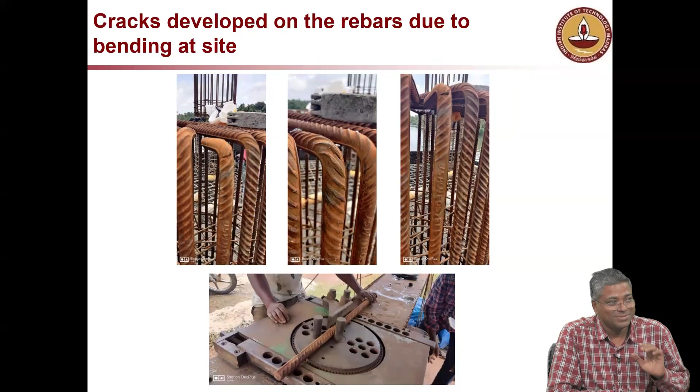So things which we think are not very important actually cause problems when it comes to long-term performance - not for design for commissioning, but for design for durability. I think I'll stop here and then we'll move to the next topic.

No, if you have a proper plateau, then you don't need to. But mostly in TMT bars, that one was actually small diameter bars, because the ferrite pearlite was so high in that, not the tempered martensite. The combination is what gives you the result.

I know what you're telling - you're saying that perfect horizontal line. But if you take a larger diameter bar, you will not see that much. Oh sorry, yeah you're correct - ferrite pearlite will have proper yield and not the tempered martensite. So in the composite action, you will have kind of a mix.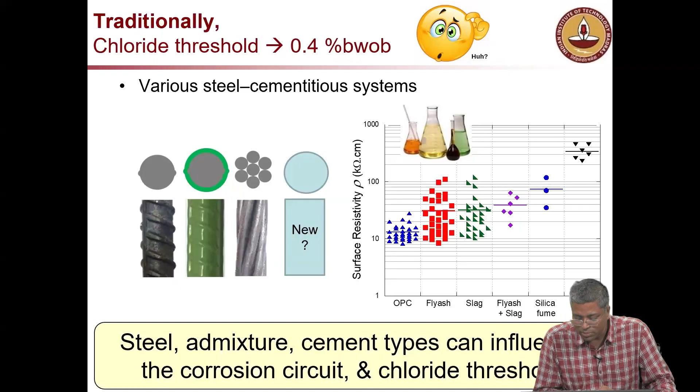Carbonation is a different story, but now when you have this kind of highly resistive concrete, we usually see micro cell corrosion, we don't see macro cell corrosion. I earlier mentioned micro cell, macro cell. So basically you can have a small region with chloride and corrosion can happen right there. I don't need another bar to support me to actively corrode.

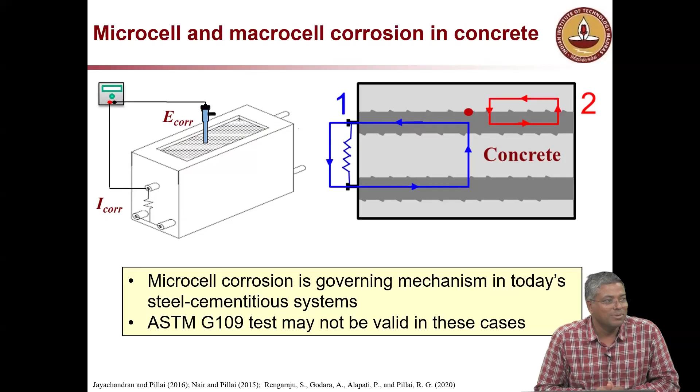Okay, let's forget this slide, let me just skip. So last hour, few PhD students have worked on this chloride threshold. This graph, it took 15 years to make.

Of the chloride threshold value, which I said as boundary condition, the minimum amount of chloride required. What you're seeing here is, historically people used to say 0.4 is the chloride threshold, but now with new cement and new steel coming into the market, this value is changing. So some sort of estimates we have on this chloride threshold of various steel cementitious systems.

Not only steel, but what I mean to say is, if I put a steel in OPC, I might have a different chloride threshold than when I put it in fly ash based concrete or slag based concrete. Now for pre-stressed concrete, we generally see about 50% less chloride threshold. So it's more dangerous, or rather more concern when it comes to pre-stressed concrete, because it's under stress.

I don't know if you noticed today where you had the tea break, did you see any broken anchorage? A 12-year-old piece. That bridge was designed for 100 years. So that was a pre-stressed concrete element, a pre-stressed steel.

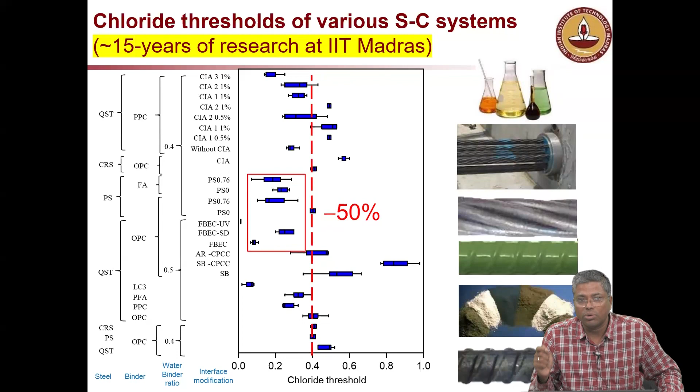So pre-stressing steel is also like that. You pull it, you keep it there. When some chloride comes, it will find its way through the steel and go in. So it can have more problem than a regular steel. It's more vulnerable to corrosion than regular steel.

What was the thickness of passive film we talked about? In what unit? Angstroms. Okay. So these inhibitors will densify that and make it more resistant against chlorides.

It's very promising, but it's difficult to convince somebody to use this. I'll come to that point later. Why? So this is a parametric study we did earlier. Karupanasamy did it, and you can see almost 3 times increase in the median service life with and without inhibitors.

I'm not telling you to take this slide as it is, but what I mean to say is that it is very beneficial to use inhibitors. This is from Karupanasamy's PhD.

One problem with this inhibitor, why people don't really use it, is because there is no vested interest on the contractor's side.

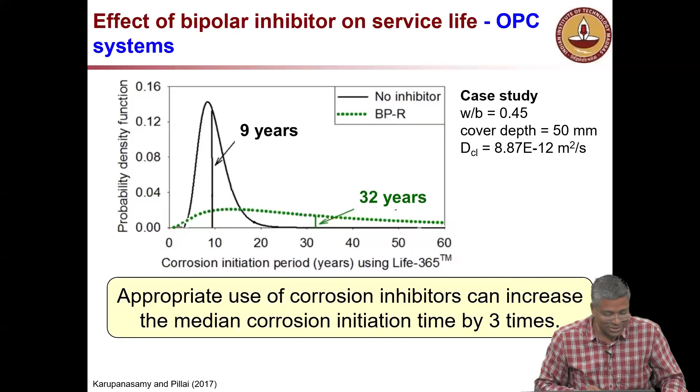Okay, so with inhibitors, when you use fly ash and all that, you have some issue with the chloride threshold. It will kind of reduce, but the eventual effect is different. This slide is not something you have to worry about. Chloride threshold - is increased chloride threshold better or reduced chloride threshold better?

Why is there confusion on this? Is higher chloride threshold better, or lower chloride threshold better? Higher chloride threshold is better. But when you put fly ash and slag, there is a tendency to reduce the chloride threshold.

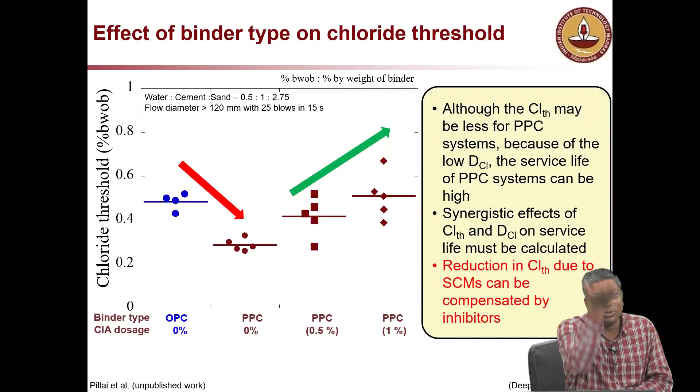However, the service life depends on how long it takes for the chlorides to reach the steel. So the speed by which chloride travels through the concrete cover also matters. It's a synergistic effect - not only chloride threshold, but the combined effect of diffusion coefficient and chloride threshold.

Am I making this clear - the speed, is that okay? One thing is the speed by which the chloride goes through, the other is how much chloride you need at the surface of the steel. So in one case, let's say I need 1 unit of chloride to initiate corrosion. In another case, I need 2 units of chloride to initiate corrosion. Which one will start first?

Tell me. That's the answer - there is no answer for this question. It depends on time to reach and build that quantity. So in the 1 unit case, if the speed of penetration is x, and in the 2 unit case, if the speed is much larger, then probably the 2 unit case will initiate first. It's the combined effect of both speed and the amount of chloride required. Food for thought.

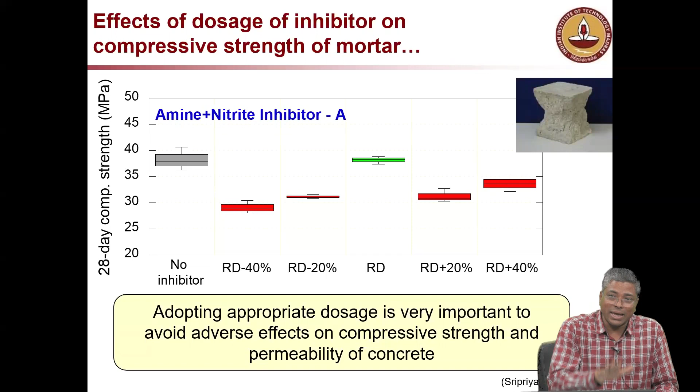But these two inhibitors actually showed better corrosion resistance. So we have to look at both the aspects - what it does to the steel and what it does to the concrete. Anything you mix in concrete, you have to look at both the aspects.

Only on the steel surface - no, the rebar, that is where the passive film... that's a challenge. So this is a very good point, because 90% of the inhibitor is waste, or even more than 90%. If you look at the volume of inhibitor which is actually working on protecting corrosion, it's very, very less. Imagine a metro pier, 2 meter by 2 meter, with reinforcement - add the area of contact with steel and concrete and the chunk of concrete which is inside. It's all wasted.

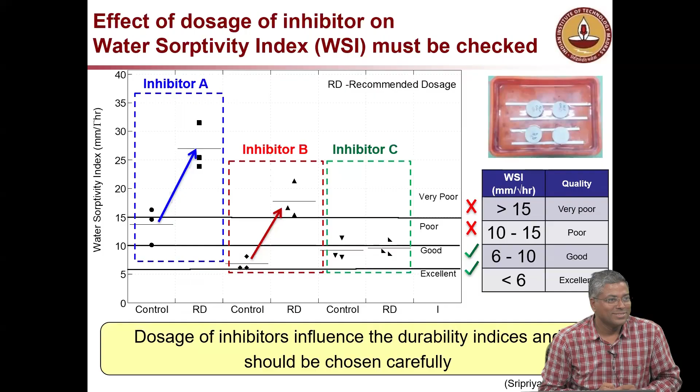There are products like that. They call it differently, but there the main challenge is you already have rust on that, and then getting good contact and all that is a big challenge.

Okay, this is... okay. Other thing is fusion bonded epoxy coated bar. Now most of the place you say epoxy coated bar, fusion bonded... so it's not necessary that it need to be fusion bonded.

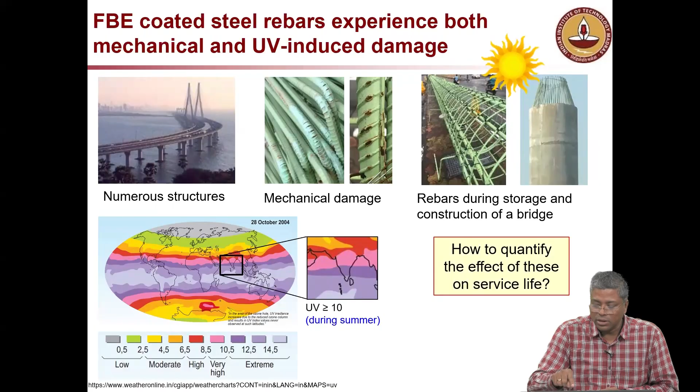UV issue. Now we did some tests, and found that when we kept the bar outside the lab, it was cracking, not bending, just like that. Look at it with your naked eyes, it looks very good.

I had another picture, I forgot to put that in this, but a bar just kept outside for 15 days, we are getting cracking. Now, is this crack big?

Even if I don't see it, water molecules can easily go through those cracks. Okay, so we are dealing with this.

I am worried whether, at home on your gate, do you paint? No, normal. We do or not? Do they corrode? If it is paint, why is it corroding? Because of UV. Paint is not UV resistant. It will crack. Visibly, you will not see it. Okay, but it will have micro cracks, and this is our problem.

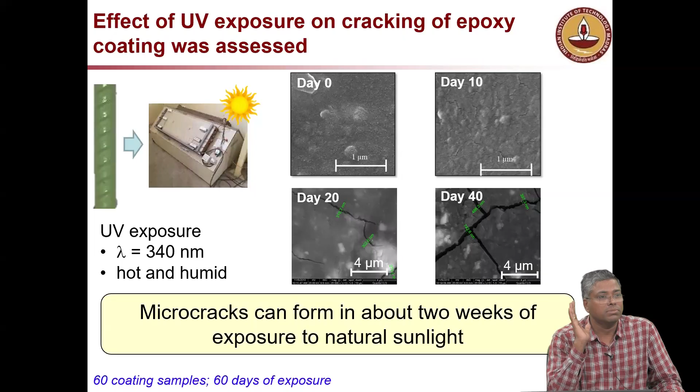And when we did the analysis, for a good quality epoxy coated bar, if it's actually cracked and there, it will give you less life than an uncoated bar. So why do we spend 33% more? On an average, it's now 1/3 more cost. You pay extra, get an inferior product. So anywhere you see an epoxy coated bar, just say no.

Let's say on your vehicle or on this bottle, if I put a scratch here, where will it corrode? On the scratch. So what is the anode cathode ratio, high or low? Because the scratch becomes the anode. So do I have a very high anode cathode ratio, or very low anode cathode ratio?

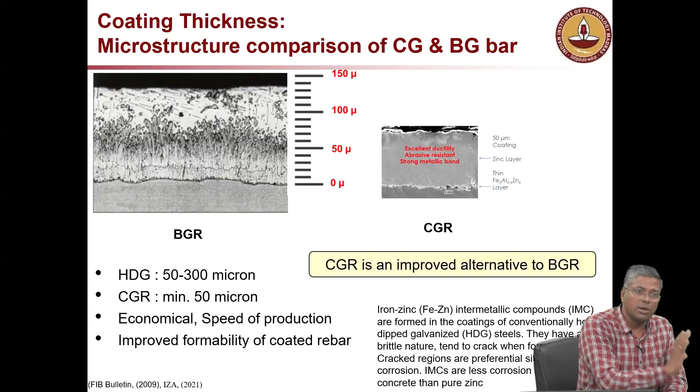Now the new one, let me skip this, is galvanized steel. That's metallic coating at least, it won't scratch as badly as epoxy coating. Two types of galvanized steels are there, the right one is not widely in the market yet, which is a thinner galvanized steel, but I just want to give you a flavor on that. I don't want to talk more, but the galvanized steel is better than epoxy coated bar. At least it's metallic.

Why am I saying this? In today's construction market, there are numerous types of coating available. Sometimes people come with a coating which is almost like rubber, you touch it, you feel like you're holding a rubber piece. This will not give you the rough handling at the site. We are not treating bars like babies, no, we are treating them very roughly.

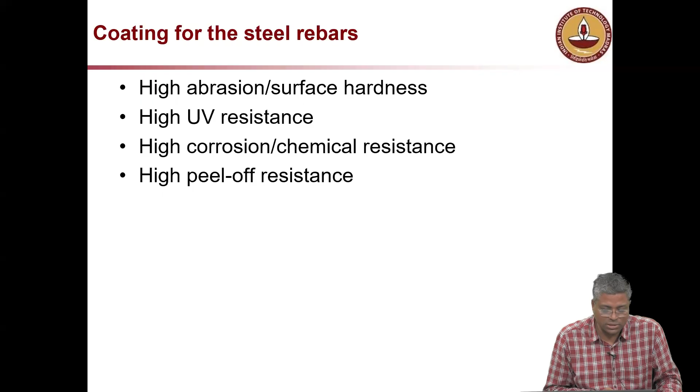So we have to consider the exposure condition. When I say exposure, I am not talking chemical exposure, but whatever the material is subjected to, the rebar is subjected to. So that's very important. From here, I'll cover later.